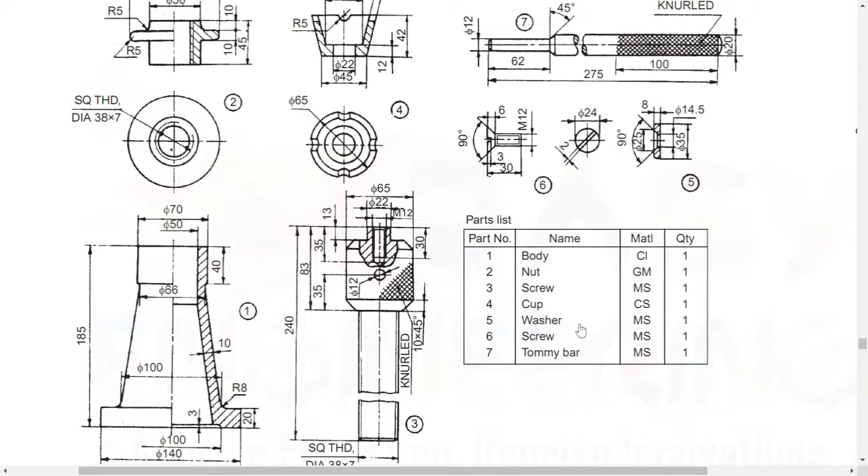In this video we'll be doing assembly of all the parts that we have created in the earlier videos. Let's open up our SolidWorks and take a new file. Instead of going for a part file as before, we will be opening an assembly file. So click assembly, OK. Make sure your units are set to MMGS over here, and then click on the first part when this dialog box appears to choose which parts are to be inserted. So click base, click open,

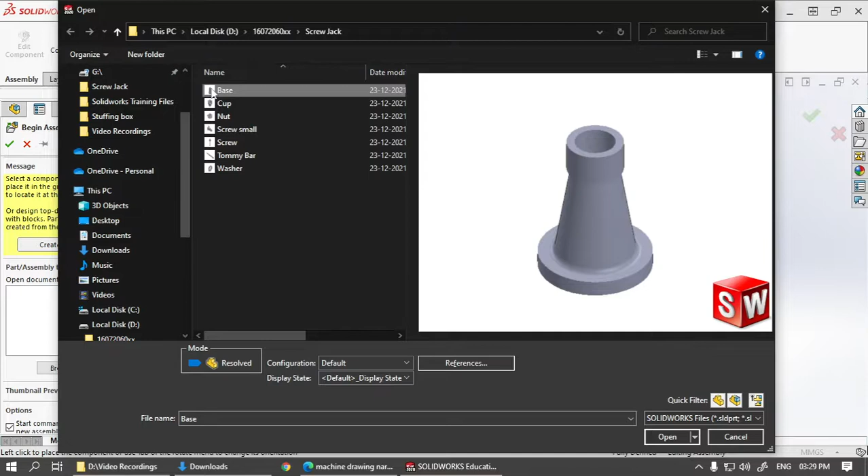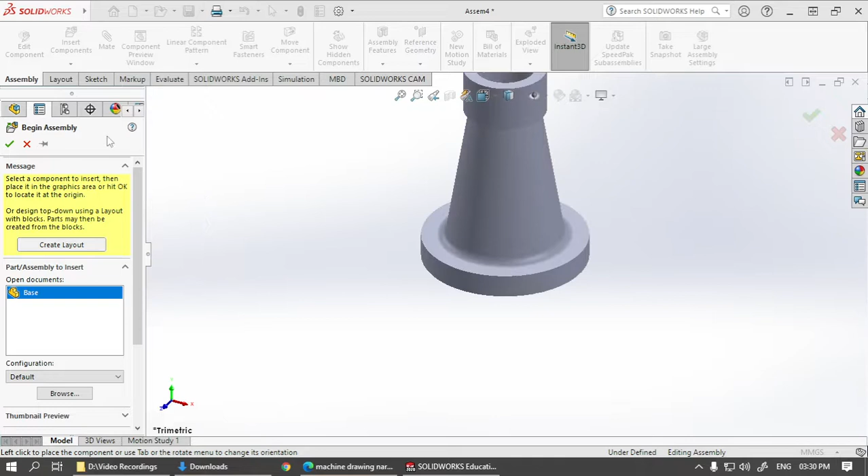and then don't click here in the graphics area. You have to place it exactly at the origin. So in order to place it exactly at the origin, you just have to move here on the navigation. When you move here, you can see it is snapping to a particular point at the center of the screen, and that is to ensure it appears at the origin. To check whether it appears at the origin, click here on the origin, and when you rotate, you can see this blue dot that represents origin will be exactly at the center of the base.

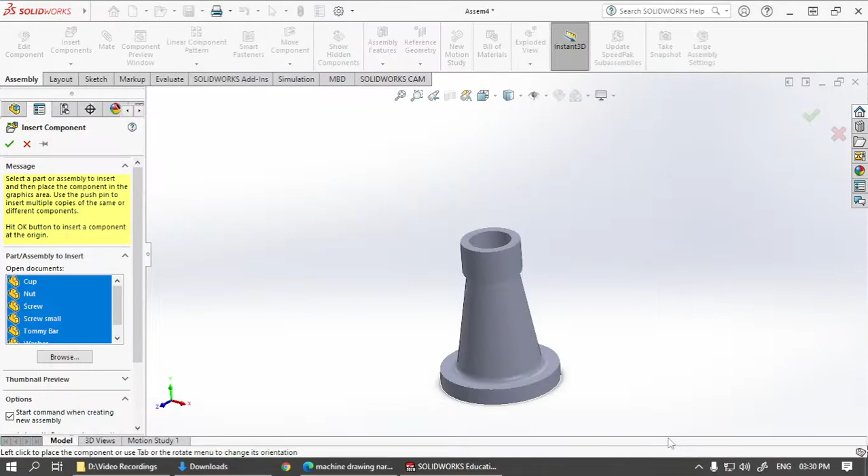So now that our first part has been inserted correctly, we can insert all other parts. So go to assembly, click insert components, and select all these parts with the rectangle. Click open. Now place all these parts side by side as per your convenience. Tommy bar, I'll place this side, and washer over here. If some of the parts are not visible completely as solids and they're appearing as lines, click 2 times on this eye symbol, which will improve their visibility.

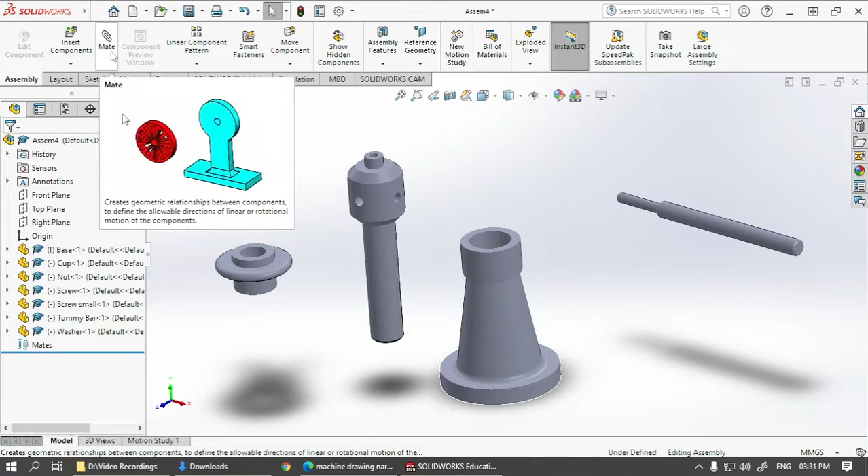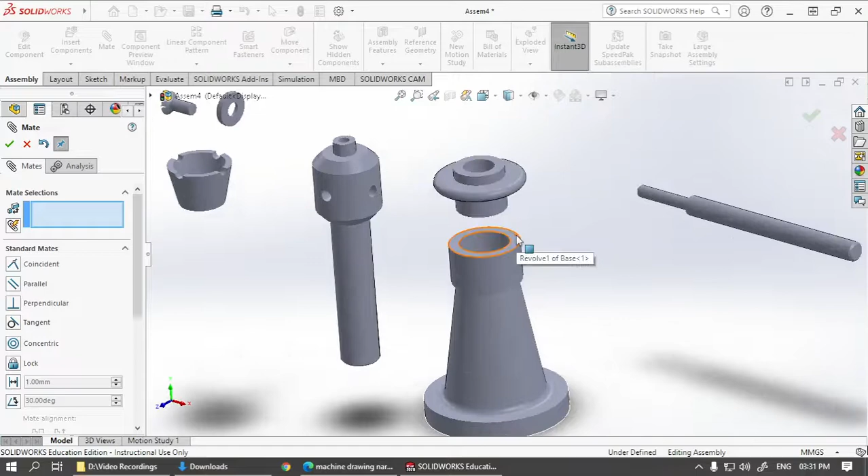Now we have to start applying the mates one by one. So click on mate. This cylindrical surface has to match with this cylindrical surface. So let's make it concentric. It is selected automatically. Click OK. And if it is appearing as lines, again click 2 times on the eye. Drag this up a bit, select this face over here, rotate, and select this face. Then it will be coincident. Click on this tick mark, click 2 times on the eye again.

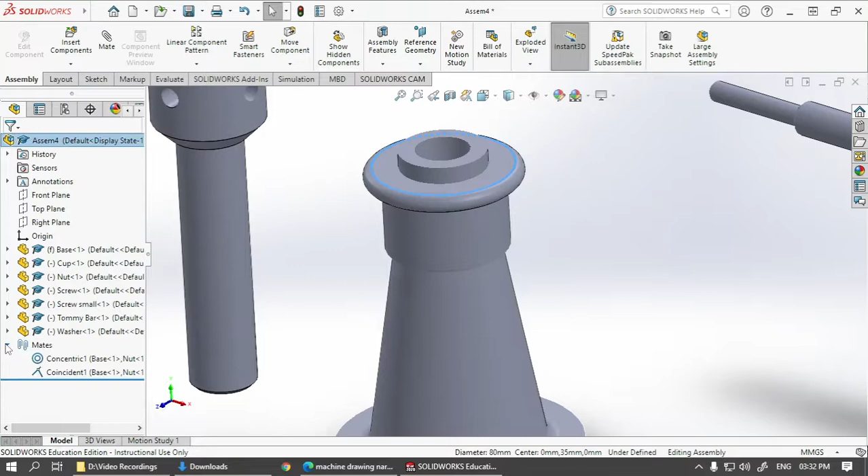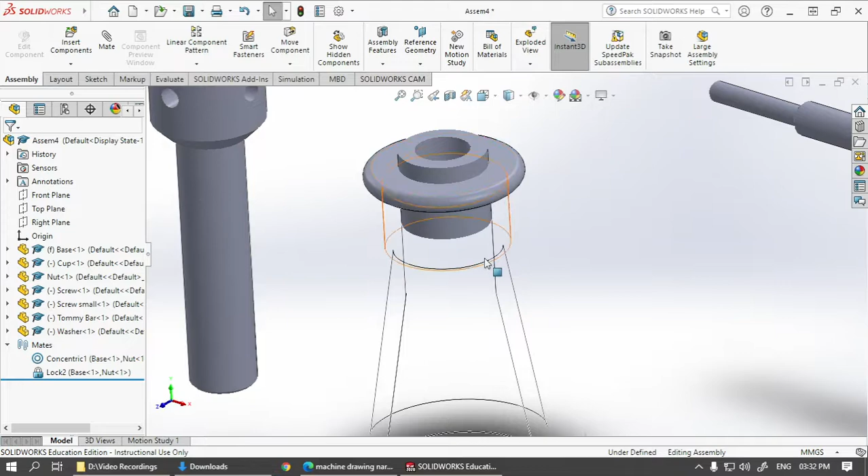Let's check these mates for the time being, because we want the rotation of this to be locked. Let's open these mates, and this part is what we want to lock down instead of just making coincident. So click on this, go to edit, and instead of coincident, just click on the lock button and the tick mark. Now the rotation of this with respect to the base part has been locked.

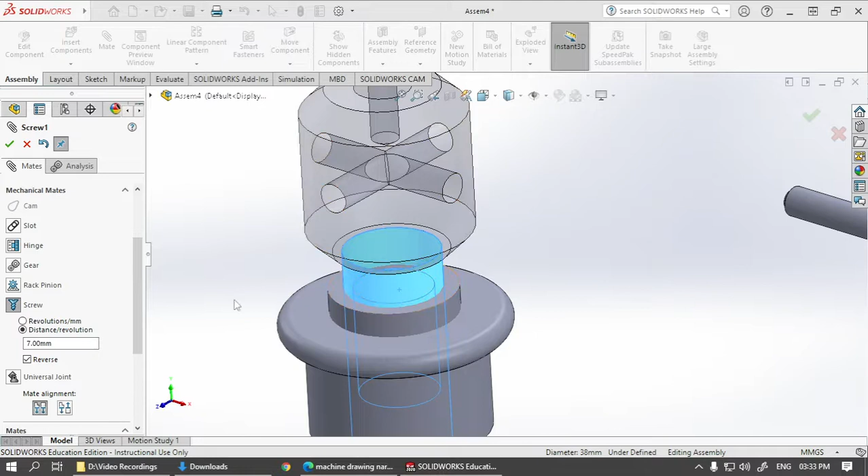The next step for us is to mate this part. So let's click for mate, select this and the inner cylinder over here. Click 2 times on the eye if you want visibility to come back. Now we don't just want them to be concentric, we want to apply a mechanical mate on this, and that is screw. So close the standard mates, open mechanical mates, and click here on the screw. We don't want revolutions per mm, we want distance per revolution. For one revolution, we want it to move a distance of 7 mm, because that is the pitch of our square thread. So click on that and OK.

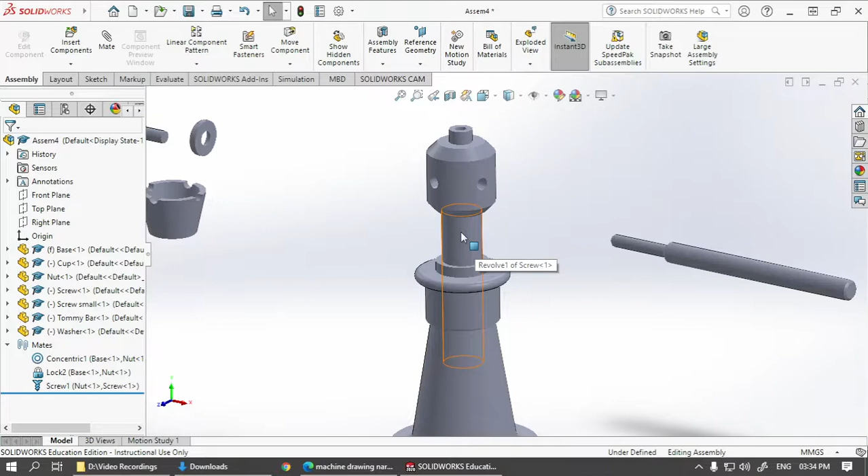Let's come out of the mates for some time to check whether our mates have been applied correctly. When I rotate it, you can see the upward movement is proportional to the number of rotations I'm making. For each revolution, it's moving up a distance of 7 mm, which is equal to the pitch of our square thread. The square thread is not visible; we have avoided it to avoid complexity. We'll learn it later if possible. Let's go ahead and insert the other parts.

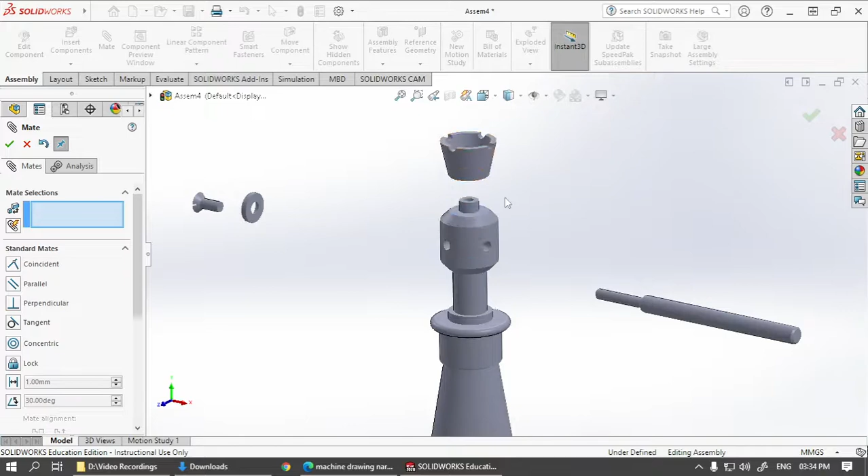So go for mate, select this cylindrical surface and another cylindrical surface. Click OK. Let's click here 2 times. Move this cup up, rotate it. This surface has to be in contact with this surface. Click OK. And of course, these two need not be locked because they need to be freely allowed to move. The reason for that I will tell you later.

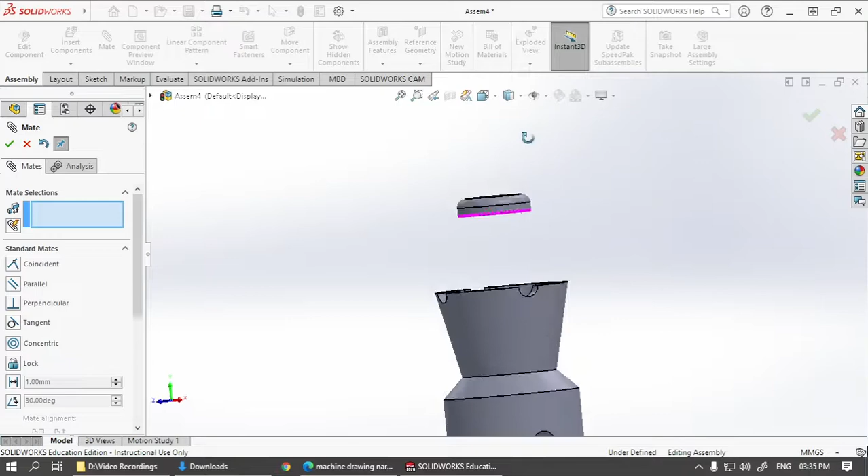Okay, let's go ahead and put the washer first. So this cylindrical surface with this cylindrical surface, click OK. Let's move it down to reveal this one. This surface has to touch this particular surface. Click OK.

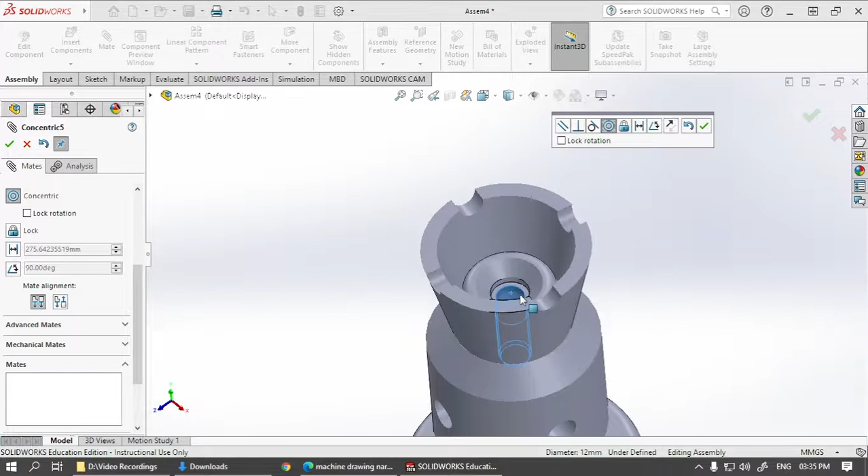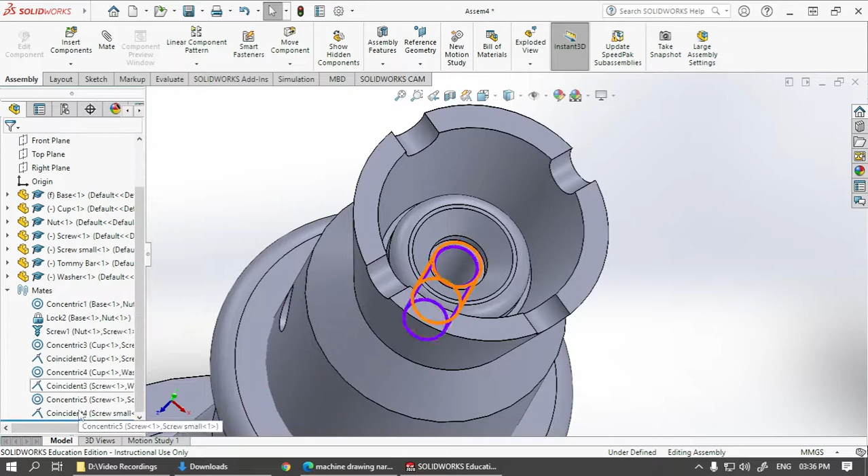Another mate. Now we need to insert this screw here into this. We want to reverse it because we want this part to come up. So click OK. Now it's properly arranged. Next, we want to make this surface coincident with this surface. Not just coincident, we also want to lock it. So I can again go here, edit, and instead of just coincident, click on the lock and click OK.

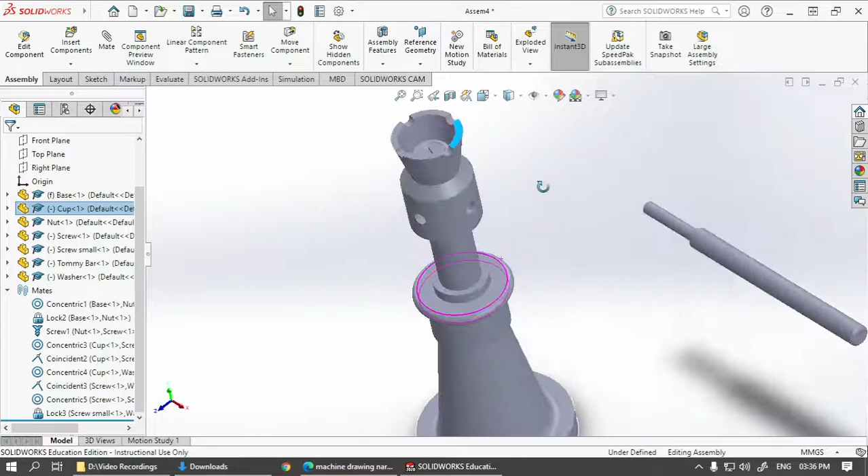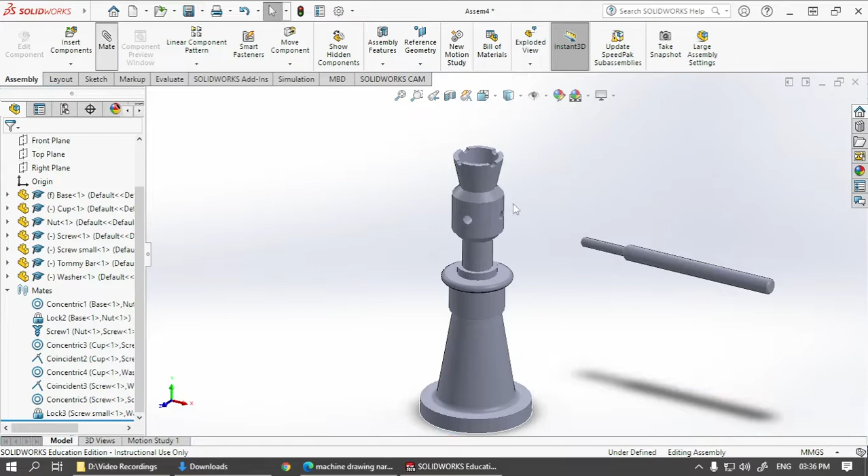So now it has been locked along with this one. You can see that when I'm dragging this upper cup, our screw is actually rotating according to the screw thread. The last thing I think we have to apply is a mate on this, and oh sorry, that is the wrong one. Let's come out of this. Let's again go for mate. This cylindrical surface has to match with this cylindrical surface.

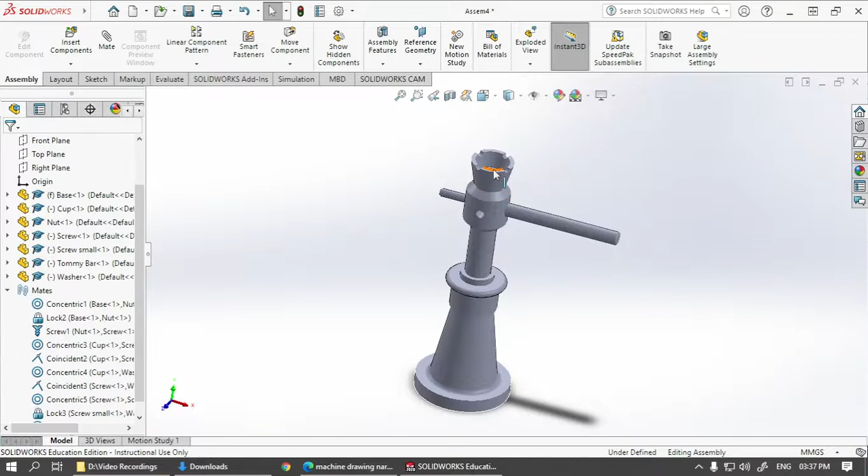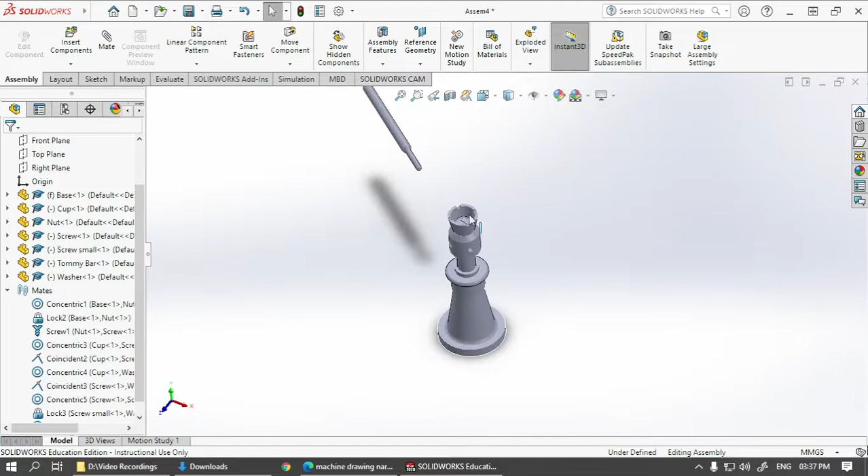So that's it. So when we move this tommy bar, okay. Oh, that's a bit problematic. Anyway, let's hold the cup and move it up and down, and you can see it's moving as we want it to. Fine. All right. This is really bad. Anyway, this is the assembly of our part. You can see this is moving perfectly according to our expectations. This is what we expect from this, and that's the assembly file.

So let's go ahead and save this file. When it asks for rebuild, click OK, rebuild, and you should save it to the same folder where you have saved all the other parts. So let's save this as assembly of screw jack.

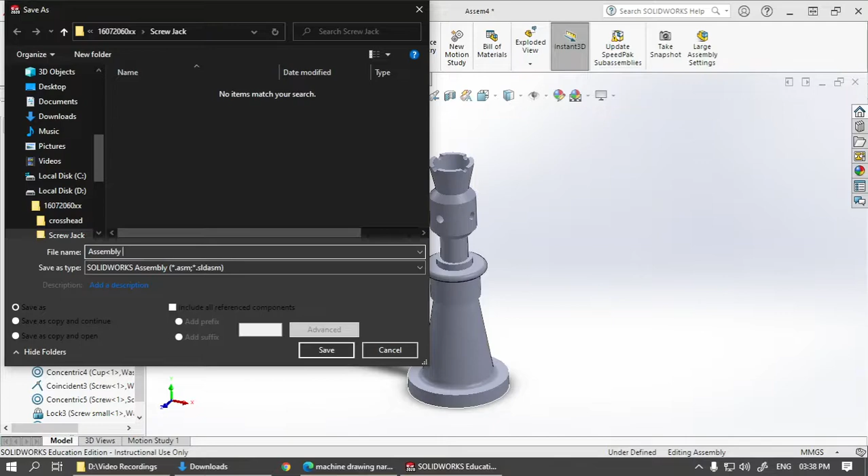So that's it in this video. In the next one, we'll take up another assembly. We'll do all the parts once again, and then finally we'll do the assembly.